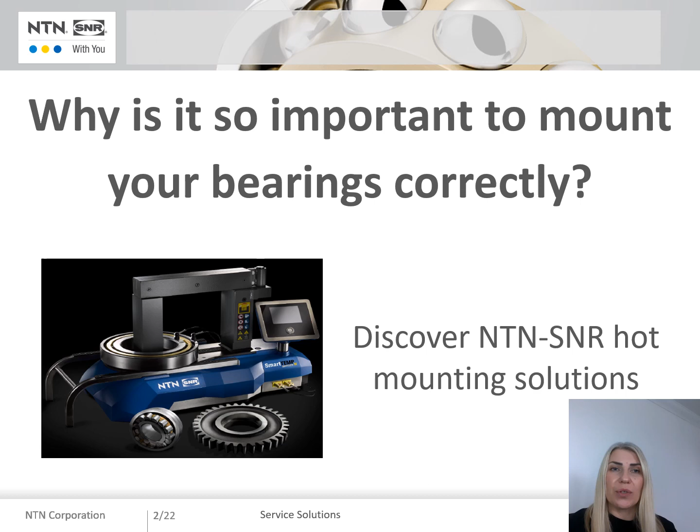Today I would like to introduce to you our hot mounting solutions. Let's start this presentation by detailing the main causes of bearing failures. Lubrication issues account for 55% of premature failure. Pollution problems in 16% of cases. Poor assembly is the root cause 17% of the time. An overload problem in 6% of cases, and various other causes account for 6% of failures.

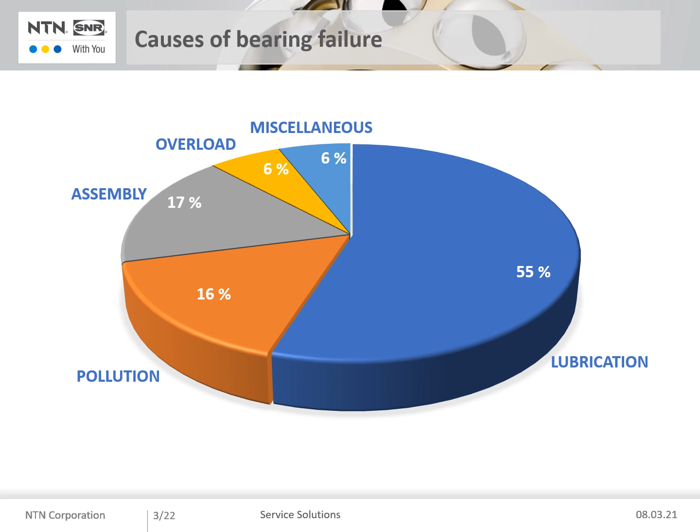As we can see in this graph, the importance of the number of failures linked to poor assembly has led NTN-SNR to develop simple and easy to implement solutions to mount bearings more reliably and safely. So, why is the mounting of bearings so important? I'm going to present below some examples of bearing damage linked to poor assembly practice.

We can see in this image a cage which was deformed during assembly, shocks caused by incorrect use of a mass, most likely a hammer. Let's continue with an example of force fitting an outer ring on the rollers. On this image we see spalling, which is linked to an axial overload generated during assembly. On this one we can see a total destruction of the bearing, which is linked to a total elimination of clearance during assembly. And finally, in this image we see a defect linked to repeated axial forces induced during assembly.

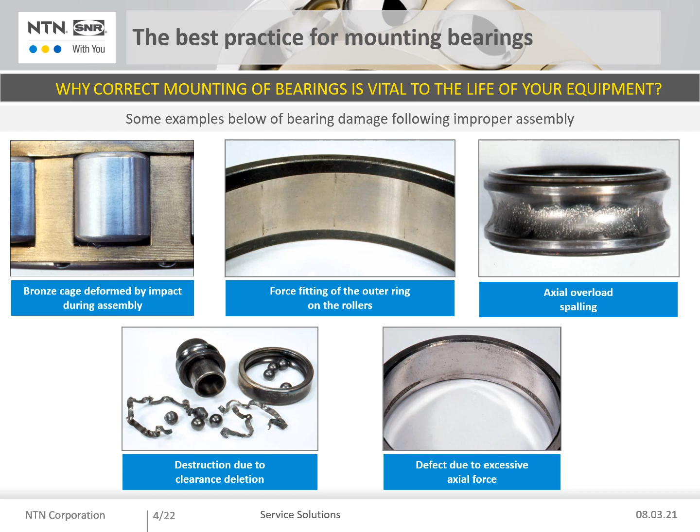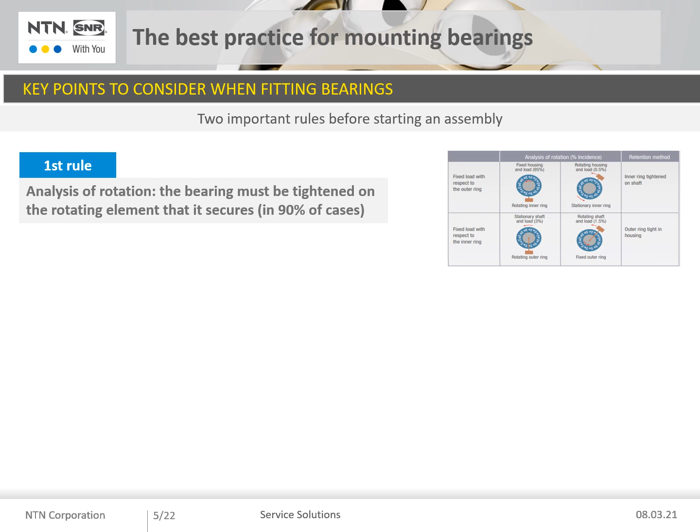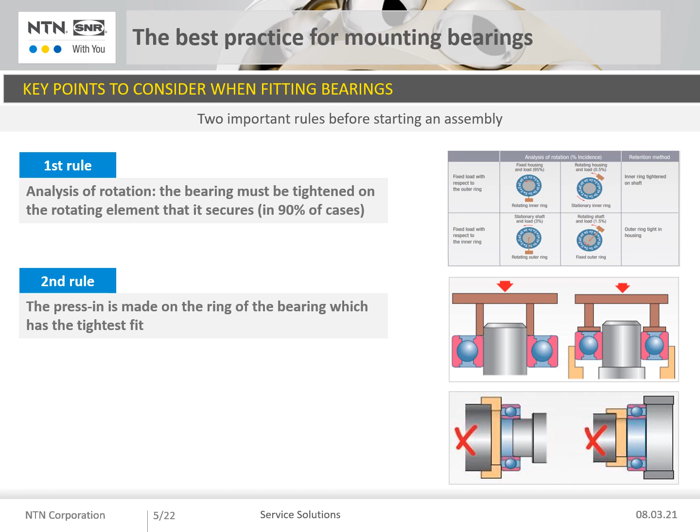We will now talk about the key points to consider when fitting bearings. First rule, the bearing must have a tight fit on the ring that rotates. For example, an electric motor, the bearing will be tightened on the inner ring. Second rule, the fitting is performed on the ring of the bearing which has the tightest fit. And additionally, remember to add mounting paste when installing the bearing. It will prevent contact corrosion and facilitate dismantling.

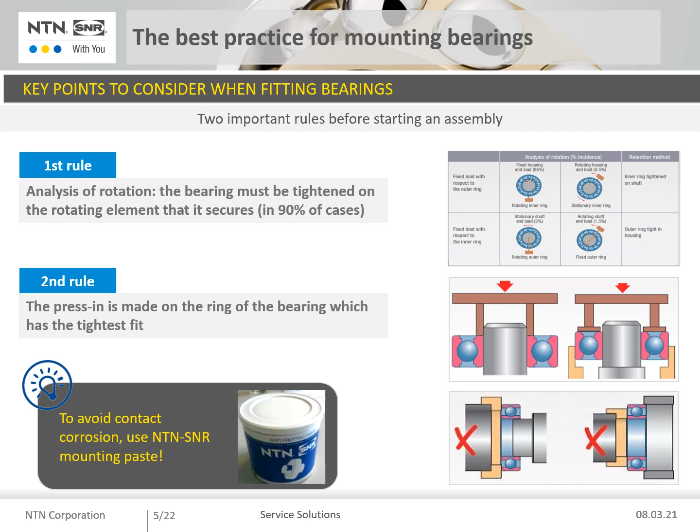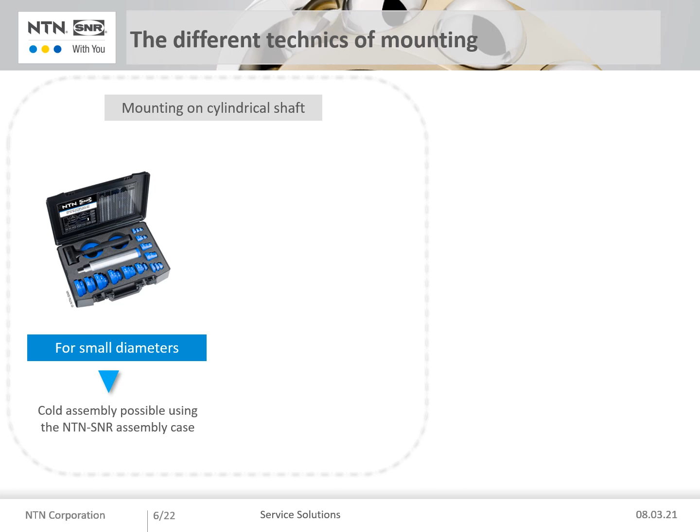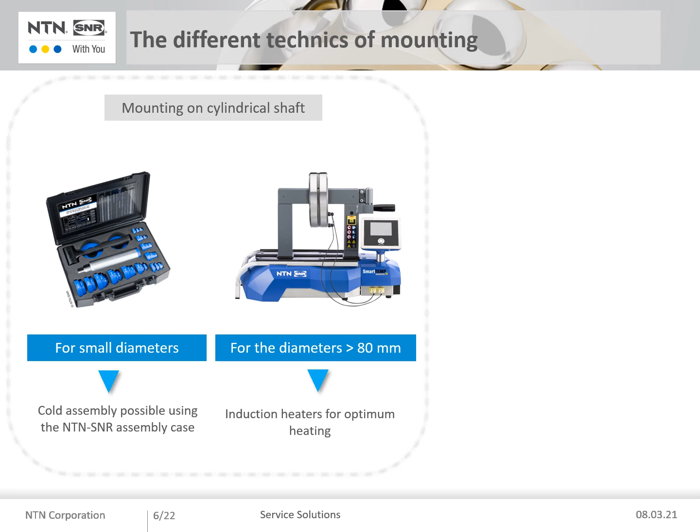Now, let me tell you about the different fitting techniques. To start, the assembly on a cylindrical shaft. For small diameters, we can use a cold assembly case. For larger diameters, above 80 mm, the bearing must be heated to facilitate its expansion. NTN-SNR recommends the use of an induction heater. For mounting on a tapered shaft using an adapter or withdrawal sleeve, we recommend the use of a hydraulic nut, which is particularly useful for fitting spherical roller bearings.

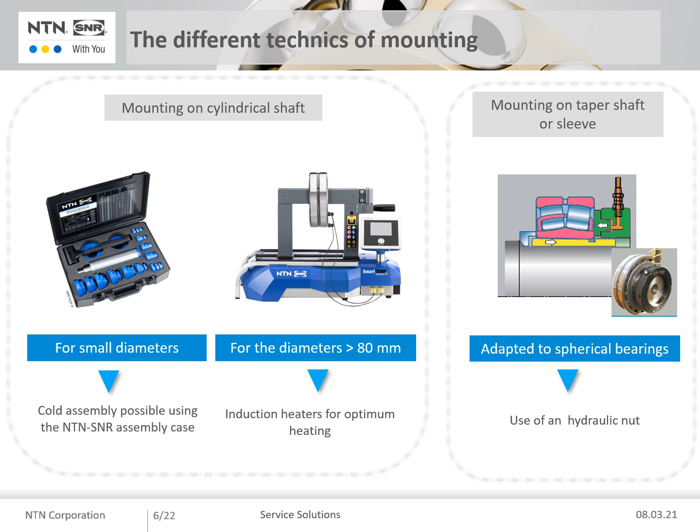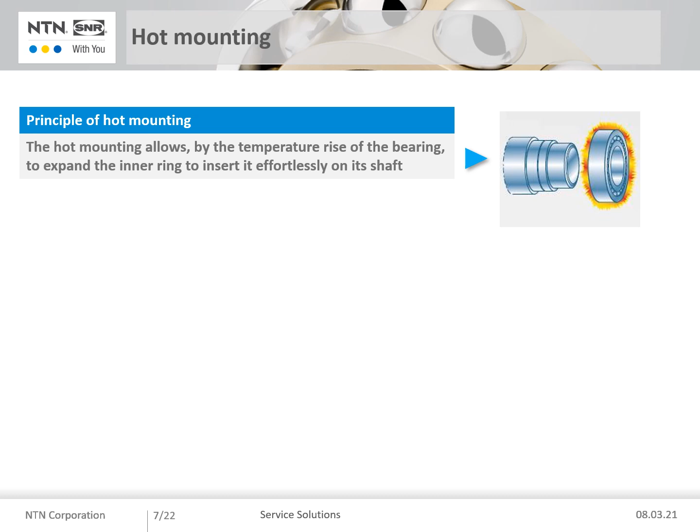We will now talk more specifically about hot mounting. Why is this technique used? Heating the bearing allows the inner ring to expand, promoting effortless assembly of the bearing on its shaft. Remember, when increasing the initial temperature of an inner ring by 100 degrees Celsius, the diameter of this ring will expand by 0.1 millimeters.

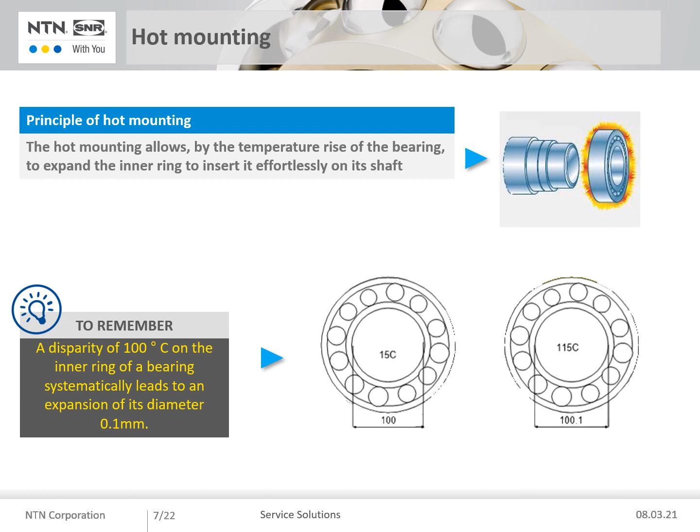Now let's take a look at the different heating methods. I will firstly tell you about the methods to be avoided. A torch or a heating plate should not be used. These two methods do not allow us to control the temperature, so there is a strong risk of overheating, leading to the expulsion of the bearing grease and probable deformation of the materials. Moreover, these methods can be dangerous for the user. Sealed bearings cannot be heated using this method.

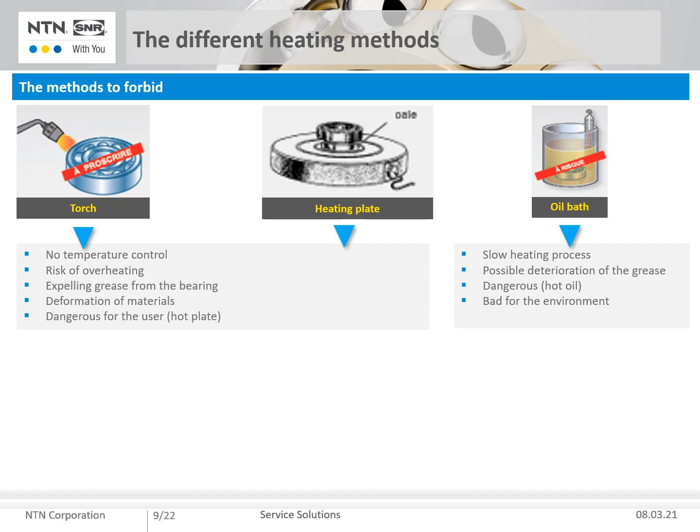Another method to be avoided is the oil bath. Its heating process is slow, there is a risk of introducing contamination, it can be dangerous for the user and bad for the environment. Again, this method is not suitable for sealed bearings. We also recommend avoiding using an oven to heat bearings. The process is very slow, consumes a lot of energy and can result in grease leaking from the bearing. Therefore, sealed bearings cannot be heated in this way.

I will end with the method recommended by NTN-SNR, induction heating. It preserves the integrity of bearings. It prevents any material deformation. It is speed and energy efficient. All this in complete safety for the user, and of course sealed bearings can be heated using this method.

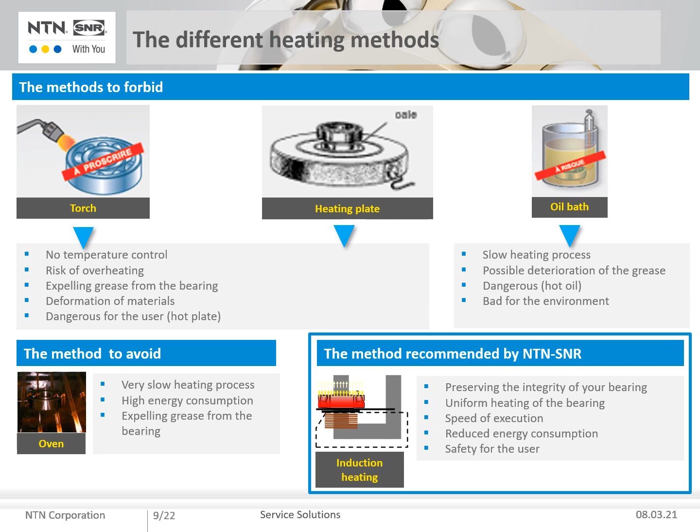Let me detail the range of NTN-SNR heaters. Let's have a look at the principle of induction heating. A coil is placed on a steel frame which creates a magnetic field. The bearing placed on this frame becomes a secondary coil in short circuit. Crossed by an alternating high current at low voltage, the bearing will heat up quickly while non-metallic parts and the appliance itself remain cold.

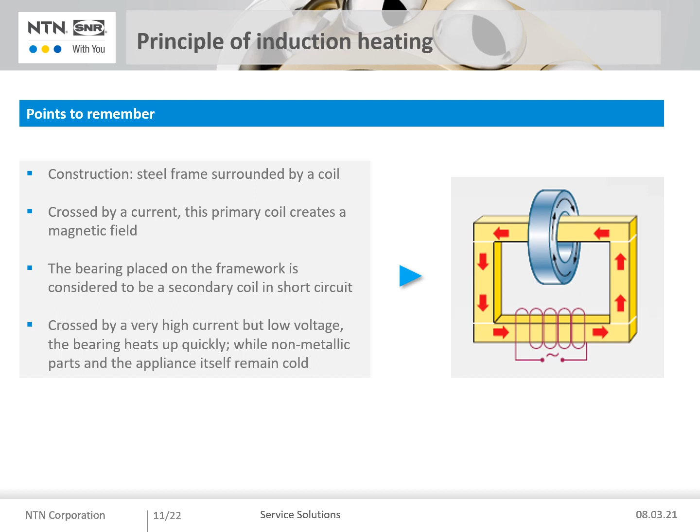I will now introduce our SmartTemp induction heater range. The range consists of 7 devices that can heat parts ranging from a few kilos up to 1600 kilograms. We start with the SmartTemp S, which can accommodate components up to 50 kilograms, the SmartTemp M up to 100 kilograms, and the SmartTemp L up to 200 kilograms.

For freestanding devices, we have the SmartTemp XL, which can support 400 kilograms, the Double XL up to 800 kilograms, and finally the SmartTemp Triple XL, which can support loads of up to 1600 kilograms. All our devices are equipped with an intelligent interface and innovation to obtain maximum efficiency for the component to be heated.

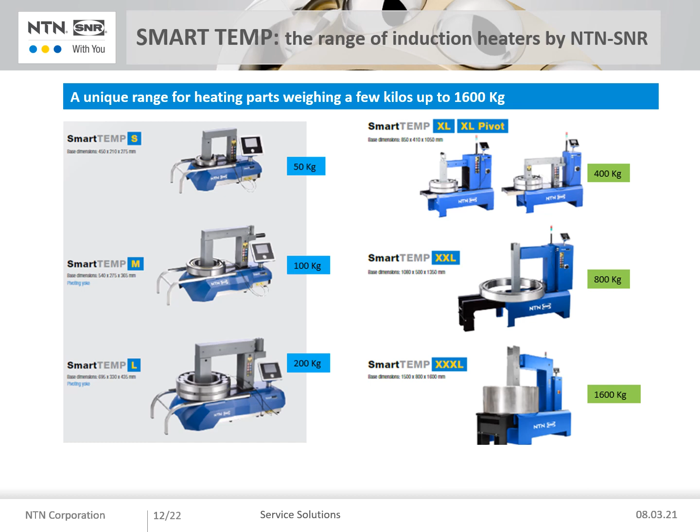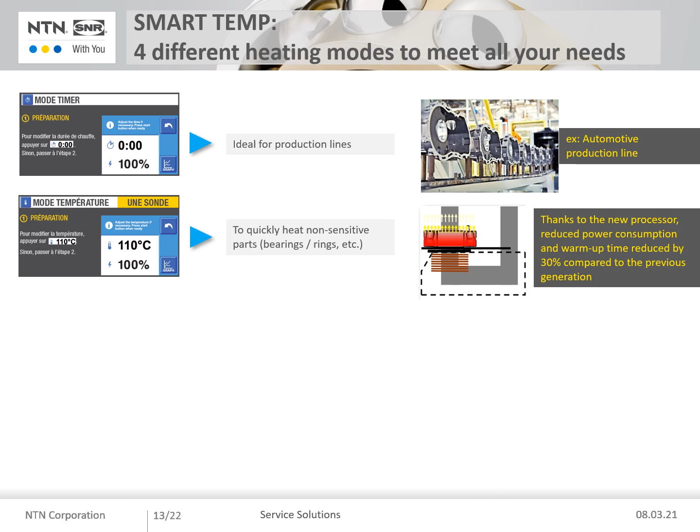Now let's detail the innovative functions of our new induction heaters. The timer mode, which allows repetitive use of the device on a production line. Temperature mode with a probe, ideal for heating a non-sensitive part. This function allows a time reduction of up to 30% compared to conventional devices, and also a reduction in energy consumption. The 2-probe temperature mode, an innovative function heating a bearing intended for sensitive equipment in the best possible conditions.

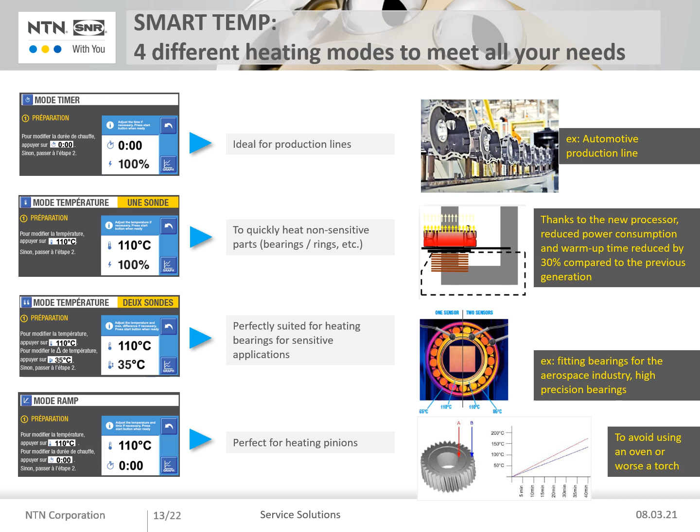The ramp mode, with preset temperature and time. This function allows pinions to be heated with the most efficiency. I will present the benefits that these different functions offer to the user. Firstly, a reduction in operating costs by optimizing the heating process of components such as bearings with the 2-probe mode or pinions via the ramp mode. Their service life can be maximized.

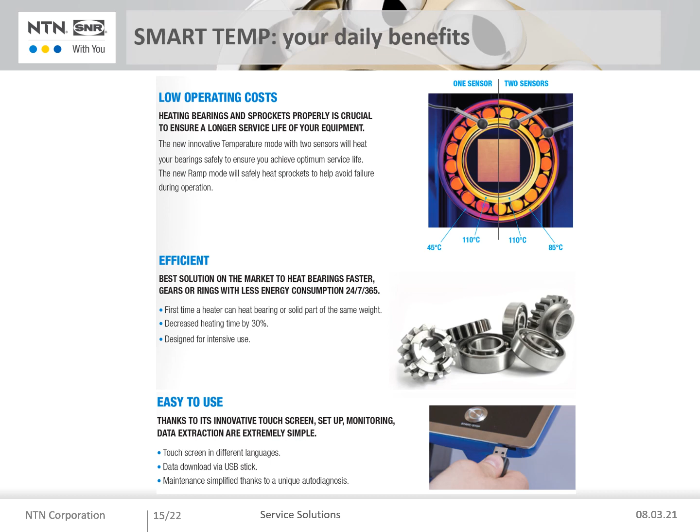Secondly, improved efficiency with a device designed for intensive use that can heat solid parts as well as bearings of the same weight while consuming less energy. Finally, easy to use thanks to its touch screen. The configuration and monitoring of the heating mode has never been so simple. In addition, it is also possible to extract the heating data via a USB stick.

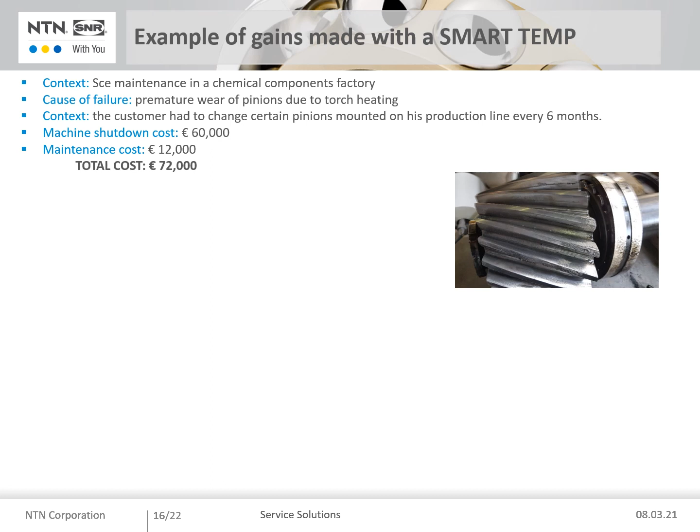Our solution: the use of a SmartTemp M to heat the pinion in the best possible way thanks to the ramp function. Gains made by the customer: €3,000 on maintenance and €40,000 for machine availability, a total of €43,000.